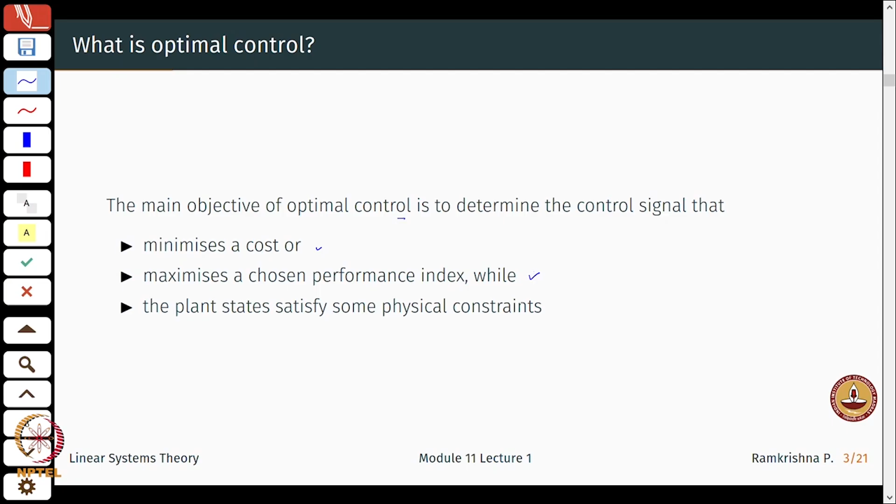So, the main objective here, if I look at optimal control, is to design a control signal that minimizes a certain cost. At the same time, does it maximize a certain performance index, and the plant could have some physical constraints. Say for example, if I drive a car, I know that I possibly cannot go beyond say 150 or 200 kilometers per hour. It just comes with some kind of a physical constraint.

So, even though a controllability analysis would suggest that the car can go from point A to point B in some finite time, if I ask, can I go from Chennai to Delhi by my car in 2 hours? Well, that's a difficult question to answer. It may not always be possible, because my car is physically constrained by its maximum speed.

Then in most cases, I also want to maximize a performance index. If I go back to the web server problem we had in week 1's lectures, can I serve maximum requests per second? And not only that, can I also serve requests as fast as possible? There was a contradiction in that particular problem. And then of course, I want to minimize the overall cost.

So, ideally I would want maximum performance at 0 cost. That is the ideal situation. Unfortunately that does not happen. So, is there something that will help us a bit in this? Okay, what could be other examples?

Something which is being talked about everywhere is soft landing, so to speak. I will not tell you why we couldn't get to a soft landing; we will leave that for somebody else to say. But just to draw some parallel between what I learn here and what I see on TV each day, look at a soft landing of a spacecraft. I am just saying it is simplified; we can't do better than those scientists.

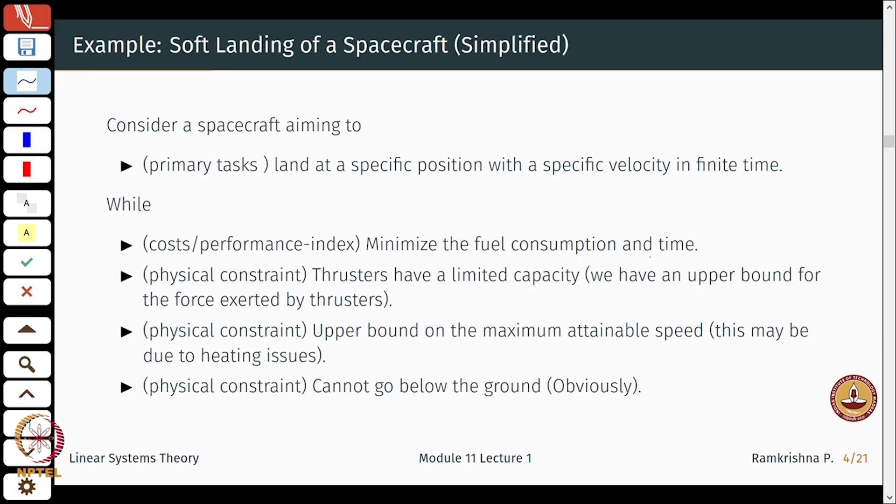This is kind of obvious, but this is a real time physical constraint. Okay. Now, what do we need to solve such problems? It's kind of fancy to talk about these problems of what they call also as soft landing and so on. What do we need to solve such problems? Well, from our control engineer's perspective, we need a few things, right. I need some information.

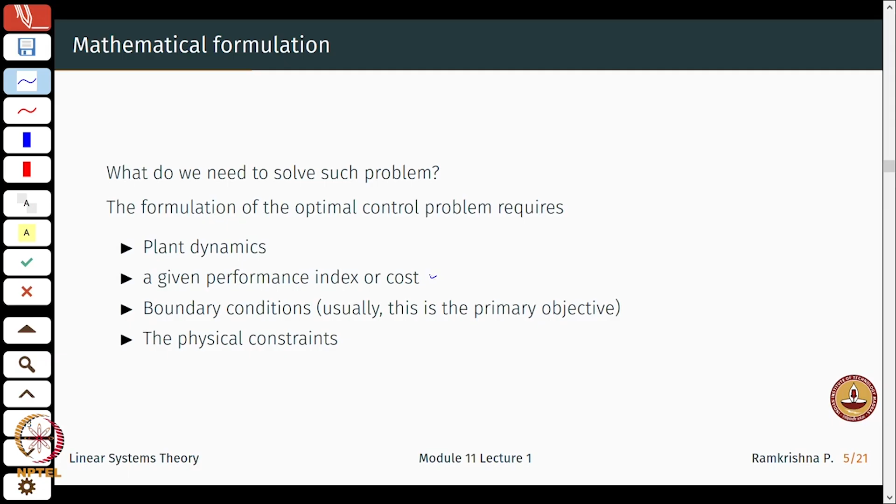First is I should know the plant dynamics as closely as possible. I need to know what is my performance specification. For example, my performance specification as a teacher should be on my teaching abilities, but not my football skills or lack of that, right. So, given a performance specification, boundary conditions, what are my limitations of what can be worked out, what cannot be worked out, and then of course physical constraints of the system.

So in general, if I were to look at formulating this problem mathematically, all the time what we were interested is, given a physical system, can we write a model of that? A model was a mathematical abstraction of the system in terms of linear ordinary differential equations mostly in this course. So, from that model, can I derive a control law and then put it back to my original physical system? That was my very straightforward design procedure said in a simplified way.

Okay. So, let us say one of the more general forms of cost function. I think different books will start with different motivation, because we are not really doing an optimal control course here, but this is just a little introduction to optimal control. You are not even scratching the surface, you are just maybe watching the surface a bit from distance. So, what am I interested in? What does this entire integral here mean? Let's analyze each of these terms a little in detail.

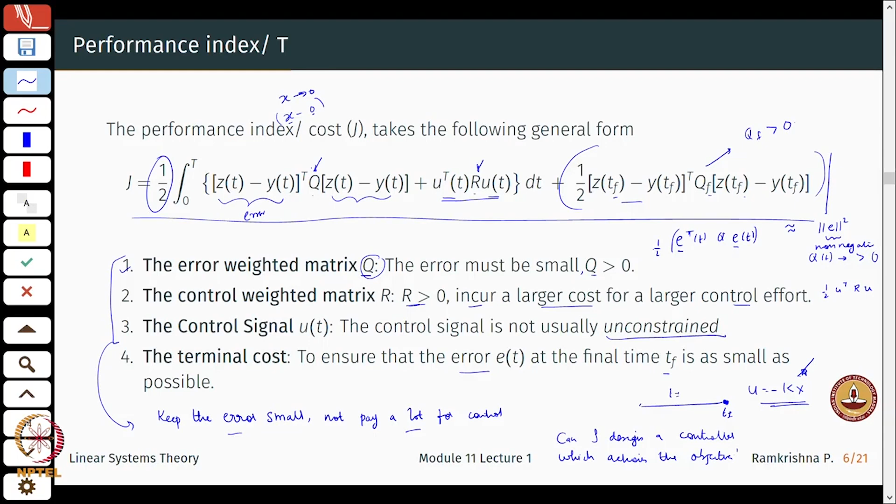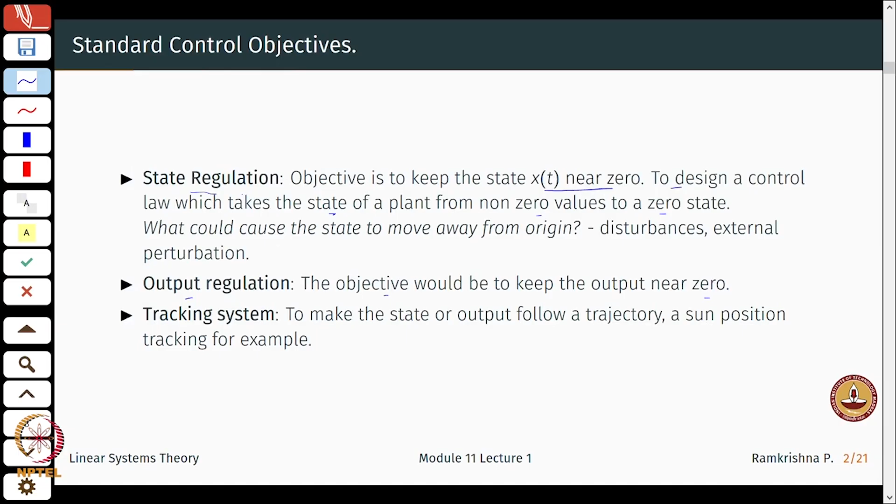So, we are here talking more like a problem where I am looking at some kind of a state regulation problem where I just want the states to go to 0. Okay, and then similarly, I will have some kind of a terminal cost. The cost is the cost of not reaching the desired position at the terminal state, and as usual, I want this to be as close to 0, or x(t) to be equal to x desired, at least as closely as possible.

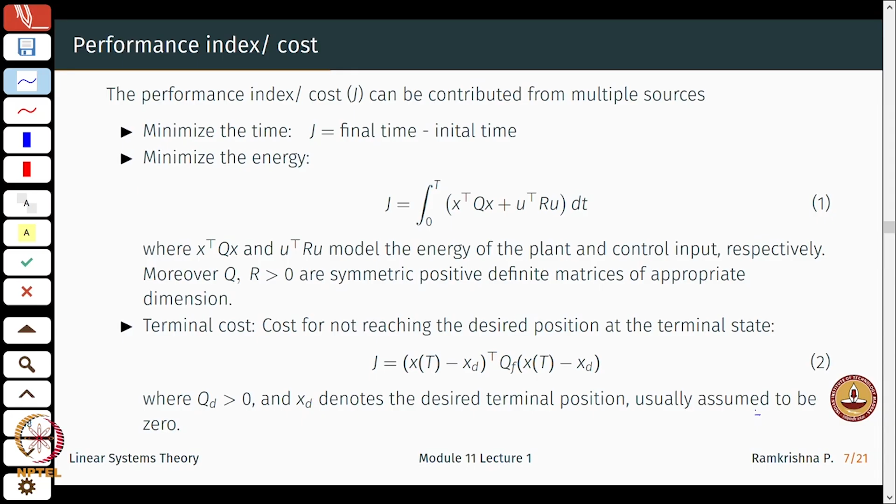Okay. So, we start with a bit of an assumption that sometimes the terminal cost is assumed to be 0. What we start with first is a finite horizon problem, where a certain initial time and a certain final time are fixed. So, what is the problem here? Given a linear system x dot equal to A x plus B u with some initial state, determine the control signal u that minimizes this particular cost function.

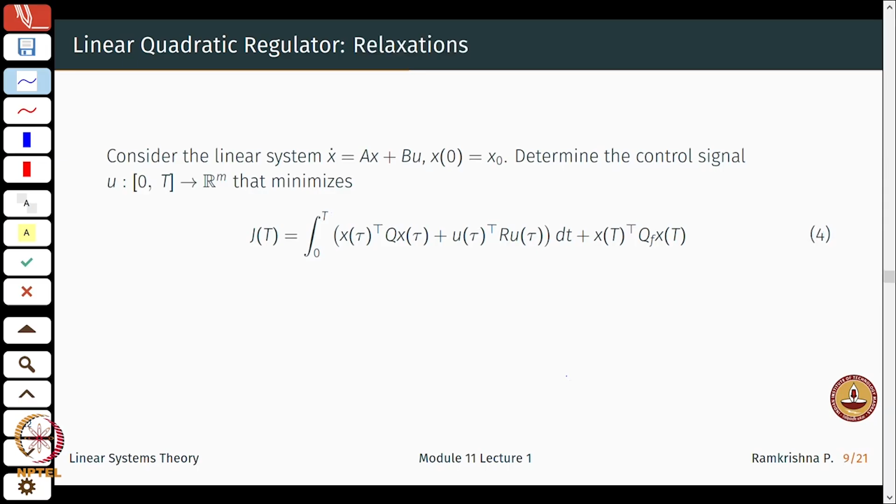Okay. Now, minimize this cost function. So, what is the observation here? First, I am looking at a 0 to T finite horizon problem, and then I have something which models the state cost, something which models the control cost, and something which models the terminal cost, right. And there are multiple ways to solve this problem. I will present you 2 or 3 ways which you will regularly encounter in textbooks. There might be more ways to do that.

There is lots of detailed analysis, but we will try to get for ourselves a good understanding of what is happening here through 3 different methods, and you can follow whichever method you want, all methods give me the same solution.

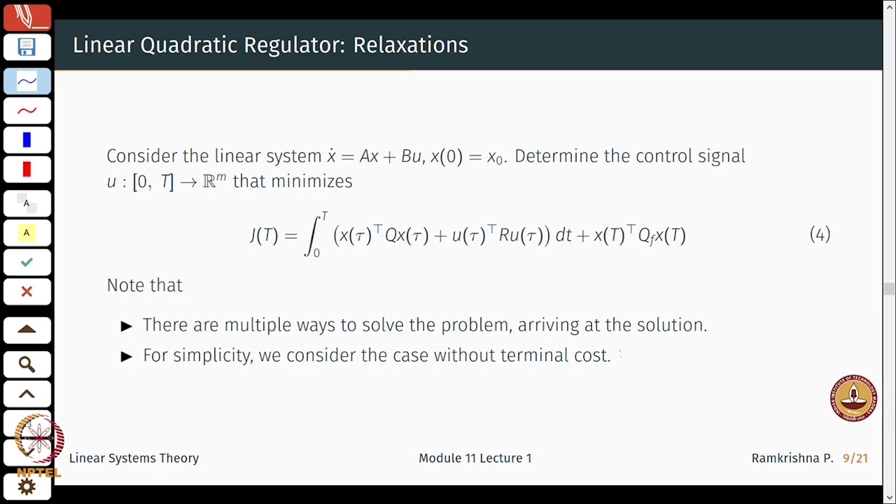So first, let us start for a case which may possibly not have a terminal cost, which means I have the cost function, also sometimes called the value function, written in the following way. Let me call this my cost function or value function, and let us say x of t is z for all t between 0 and capital T.

You can see that the value function or cost function has some kind of a quadratic form: z transpose p, depending on time, p depending on time t, times z, and this is also symmetric - it's a straightforward computation from here till here.

So the value function here computes the cost incurred due to the use of the control signal from t to T with some initial condition given x t equal to z. So we start with x t equal to z.

Let u t be a constant function over the time interval t to t plus h with some very small time h. Within this interval I can write x of t plus h in the following way, a little Taylor series expansion: x t plus h is x t plus h times x dot.

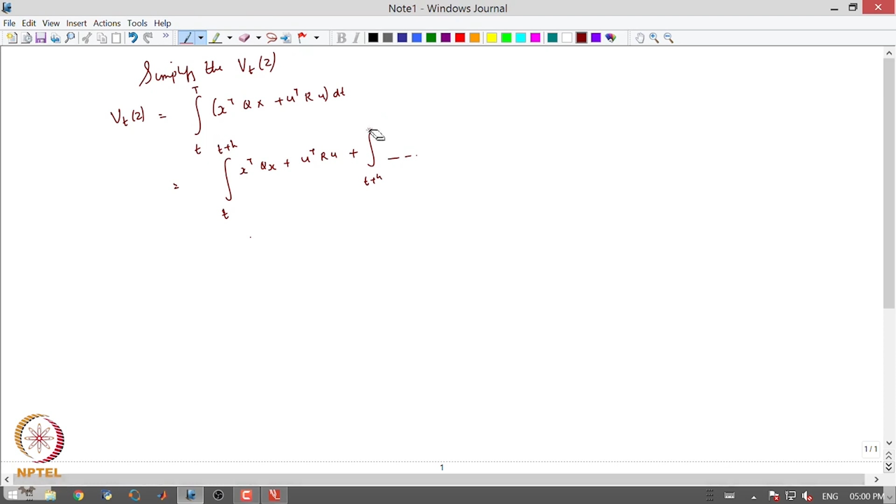So what will this mean? This will actually be the value function v computed at t plus h with x at t plus h. So this is just using the definition of the value function.

Now, from this approximation here, I can rewrite this as z transpose q z plus w transpose r w, times h, plus v at t plus h.

Now again go back to this expression: x t plus h. A simple expansion would tell me that this looks something like this: z plus a z plus b w, times h.

Now let us see what this thing looks like: v at t plus h, of z plus a z plus b w h. Now, what is v like? V is like this: v t is a quadratic in p and z.

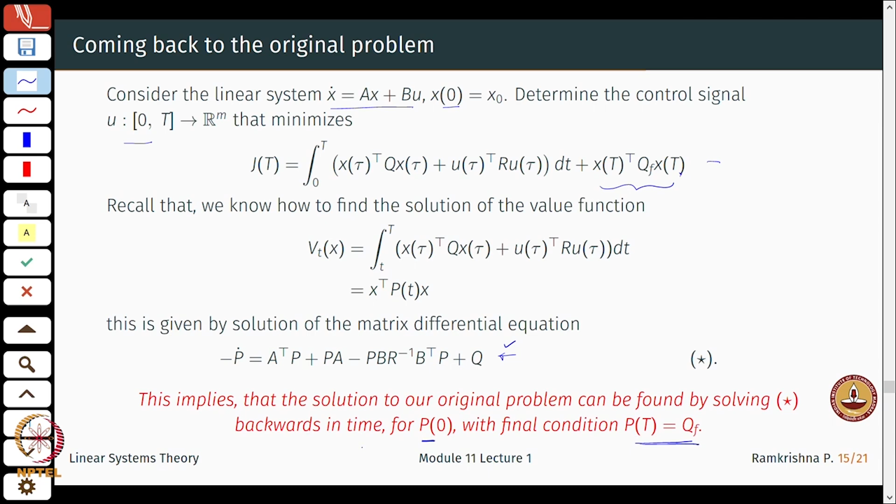So that is what my terminal cost looks like. I know this Pt is Qf and I can actually solve for it backwards in time. Once I know this, it becomes a little easy for me, so I can just substitute for that p over here. Now this p is again, this u of t which is time varying will be k of t times x t and so on.

So now what I know is that to get this value of k which depends on time, I need to solve for this unknown p via this Riccati, or this matrix differential equation. That is a little basic building block to what we are up to here. How do I solve the optimization problem or the optimal control problem? Well, that turns out to be coming from a solution of the matrix differential equation, something analogous to the Lyapunov matrix equation we had: A transpose P plus PA is minus Q.

But does the solution always exist or not? This depends on whether the system was stable or not. It will also depend on whether the system is actually controllable. The solution does not always exist, and we possibly will see problems where the solution may not exist.

The next thing most books will talk about is the infinite horizon problem, where the final time is infinity. So this is the case of infinite final time, that TF is infinity, and the final cost term may not have any interpretation, may not have any realistic sense.

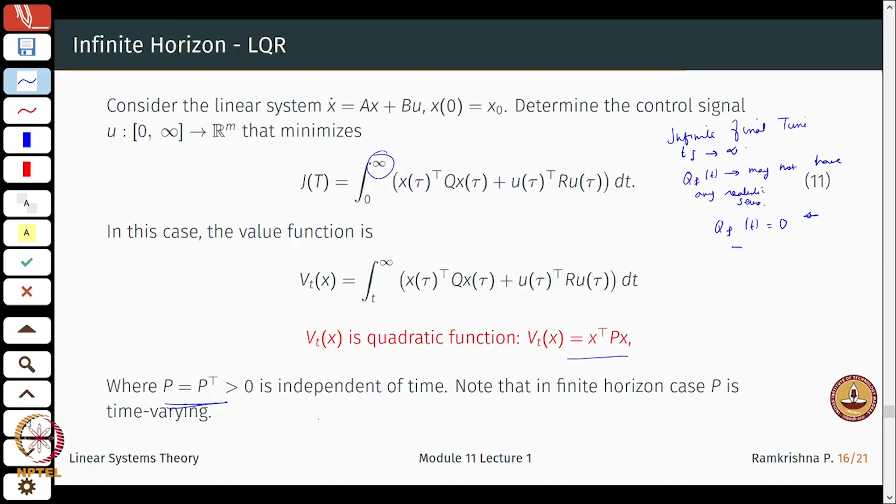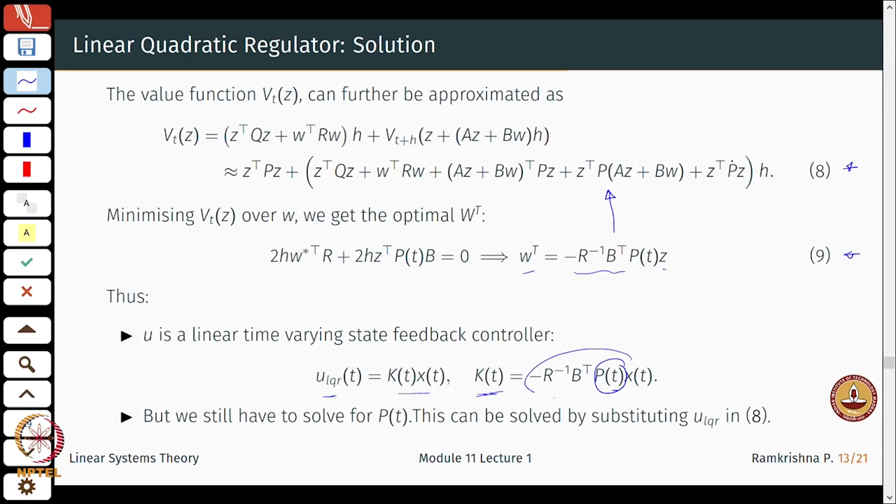So instead of a matrix differential equation, I will just have a nonlinear equation here, with no differential term. The solution that gives the optimal control law is minus R inverse B transpose P times X, where P is now the solution of equation number 12. What's important is that the gain K here is constant throughout, whereas in the previous case the gain K was varying with time because of the dependence of P on time. That is the distinction for the infinite horizon problem.

Most textbooks will first start with the infinite horizon problem, so I'm doing things a little in reverse. What I did so far was the dynamic programming approach. If you look at Ogata, he has a different method, which I'll shortly describe: consider a linear system, x dot is Ax plus Bu, with some input we need to design.

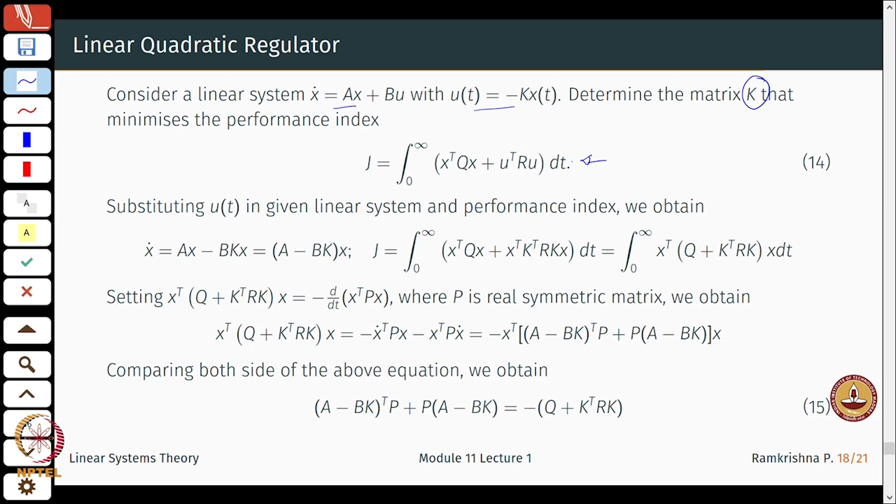In such a way that the matrix K minimizes this cost function or performance index. Let us write down the steps. What is given to me is x dot is Ax plus Bu, and I want to find a control law u equal to minus Kx, which minimizes the cost function defined from 0 to infinity as x transpose Qx plus u transpose Ru.

Integrated over dt. This is like the linear quadratic regulator, that's where the name comes from. So this is the control law, and the closed loop system looks like x dot is A minus BK times x. We've seen this already a lot. It will be safe for us to assume that this is stable, else there's no point designing this controller. So let's assume A minus BK is a stability matrix.

Therefore the cost function J now looks like this: x transpose Qx, where u is Kx, so I will have x transpose K transpose R K times x, integrated with dt. So this is of the form: integral from 0 to infinity of x transpose (Q plus K transpose R K) x dt.

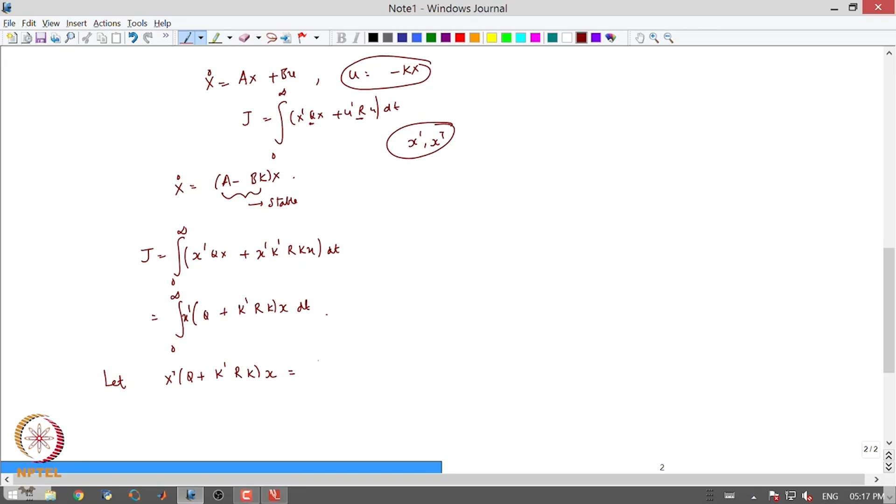Now let's do some tricks here. Let us set x transpose (Q plus K transpose R K) x equal to minus d/dt of x transpose P x. So what do we know? Differentiating this, we get minus x dot transpose P x minus x transpose P x dot, and this looks like minus x transpose [(A minus BK) transpose P plus P(A minus BK)] x. This is something we also had for the Lyapunov equation.

Now what do I know? That A minus BK is stable, right? And therefore, given a matrix Q plus K transpose R K, now because Q and R are greater than 0, this is also greater than 0. For this Q, I should be able to find a P such that (A minus BK) transpose P plus P(A minus BK)... so some Lyapunov equation like this holds.

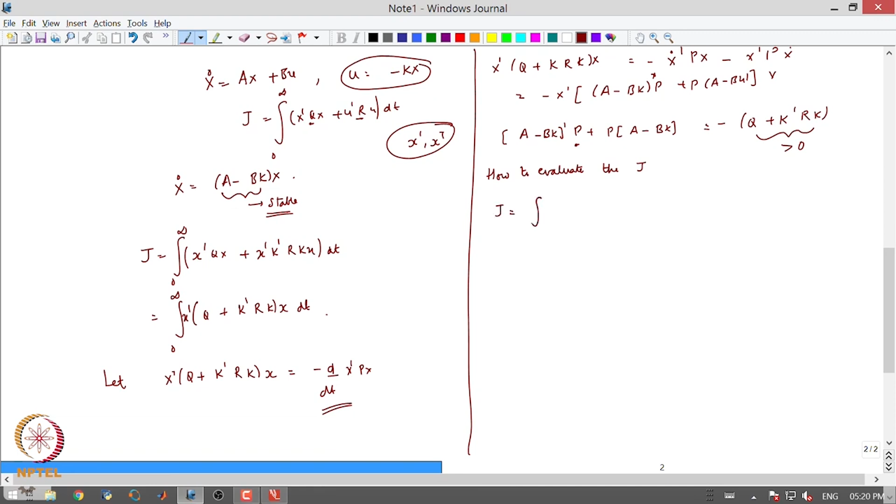Okay, now what is to be found out here while minimizing the cost function is, does there exist a P which satisfies the solution given a certain optimal K. Now how to evaluate? Or what is the P, or what is the appropriate input? So J here is now 0 to infinity. Now from here, I just do a substitution.

So J was x transpose (Q plus K transpose R K) x dt, which was x transpose P x from 0 to infinity. This is x at infinity. There will be a little minus sign here because of the minus here. Minus x transpose at infinity P x at infinity plus x naught P x naught.

Now since A minus BK is stable, this will go to 0, and what I am left with is J is x transpose P x at 0. So this means that I can find the performance index J in terms of the initial condition x naught, which is given to me, and P.

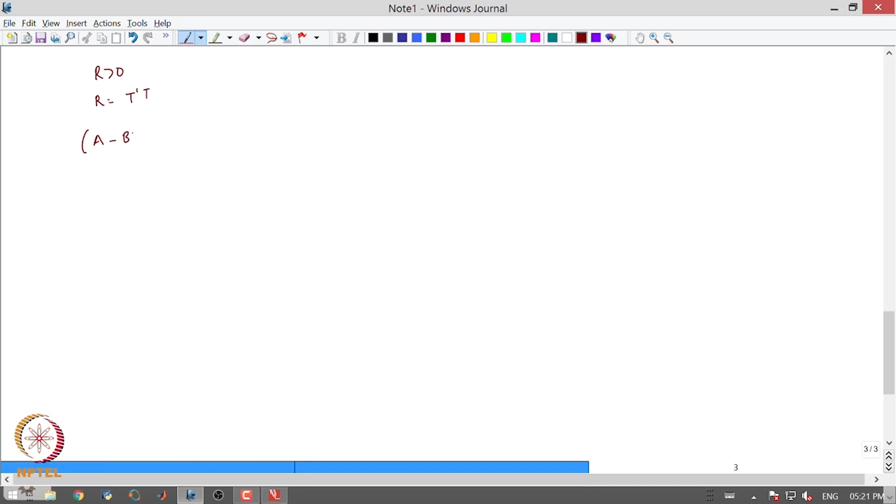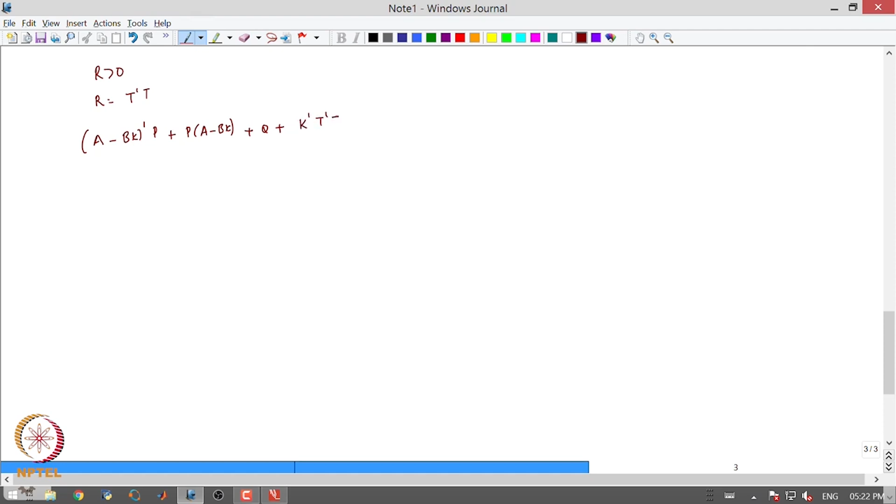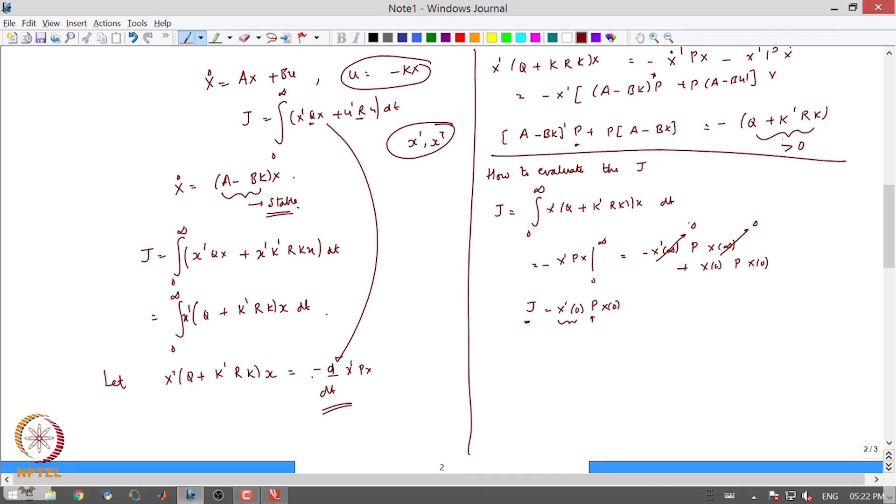Now the next step to the solution is the following. Because R is greater than 0, one can always write R as T transpose T. Again T is a non-singular matrix, and therefore I can write down my Lyapunov kind of equation like this: (A minus BK) transpose P plus P(A minus BK) plus Q plus K transpose T transpose T K equal to 0. Where does this come from? For R I just substitute R equal to T transpose T.

Next I just write down from here till here. I am just expanding terms, and minimization of these terms, again with respect to K. So this is what I am finding. What is a good K? This requires that this particular quantity be the minimum. So the minimization of J with respect to K means we may have to minimize this term.

And this occurs only when, look at this, I have x transpose, something here with the transpose, something here, and x. So this is possible if and only if this term here goes to 0. Because this expression in general will be non-negative, since I have something with its transpose, the minimum value here is only 0, and this 0 occurs when the term in the bracket becomes 0, which essentially means that TK is something like this.

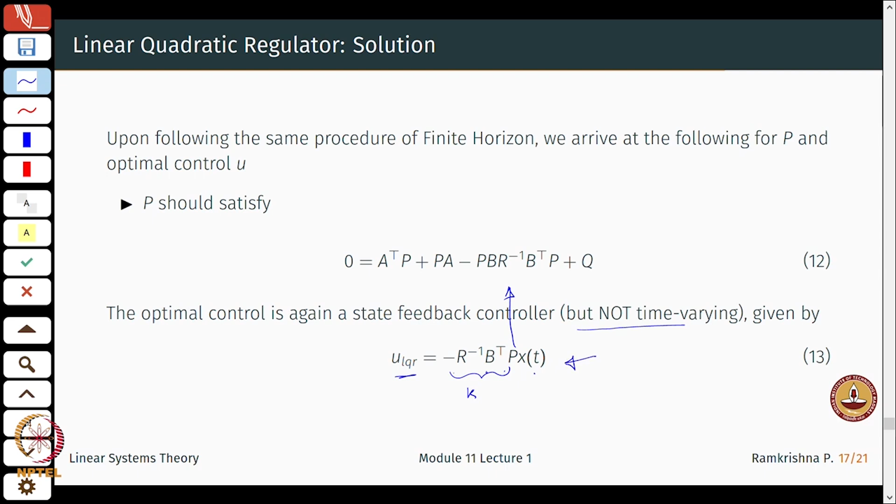Now I can back substitute and get a good looking value of K, which is R inverse B transpose P. Let's keep this in mind. R inverse B transpose P is what we also had here. This was my K here. So therefore now I have the optimal control law, which is of this form, and again the unknown here is this matrix P. Again, how do I find this P?

Well, I have this expression for K. In addition, I also have an expression like this: (A minus BK) transpose P plus P(A minus BK) equal to minus (Q plus K transpose R K). Now substitute for this K in this equation, and what we end up with is that this reduces to solving this equation in P. This is called the reduced matrix Riccati equation, or also the algebraic Riccati equation.

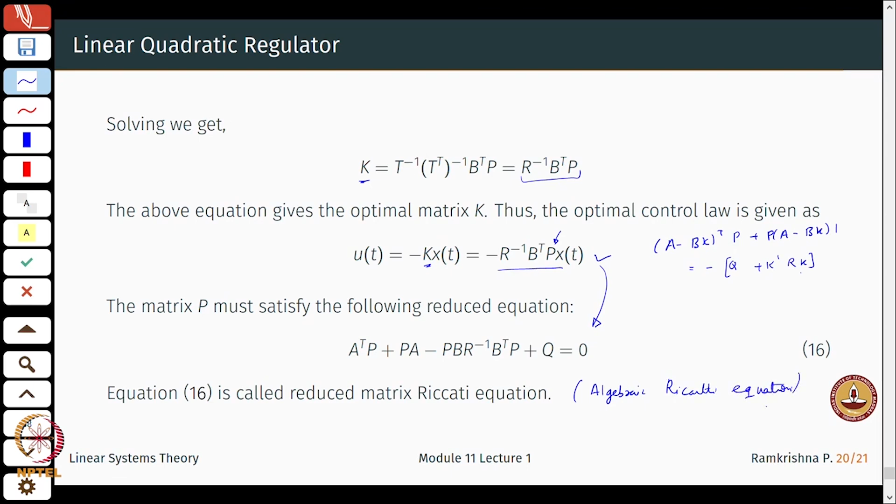So this is the second method for solving. In the next lecture, we will look at another method of solving the same optimal control problem, and I will give you a brief introduction to the solvability of these Riccati equations. Under what conditions do I get the solution? Are there simplified methods to check whether or not a solution exists? How important is controllability? How important is stabilizability? That will come up in the next lecture.